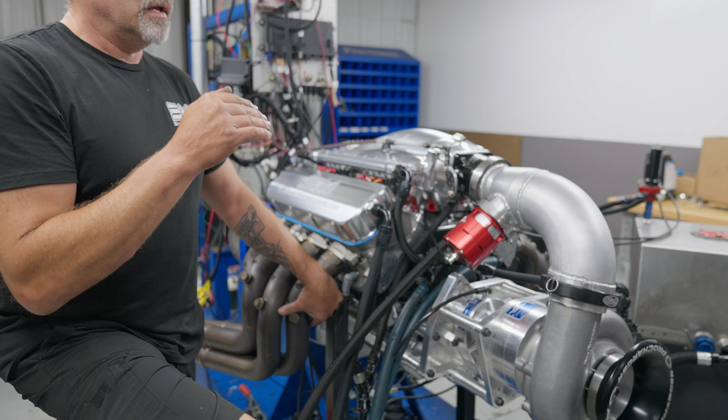Of course, I'm Steve Morris, and this is an engine that we just got done building and just got done dynoing for Raymond Hall. Kyle's been working on the tune-up.

Aw, look at that. That was a happy guy smile.

Anyways, so this is a 540 cubic inch Dart iron block, AFR 385 cylinder heads, an F3 136 on methanol. So methanol, that's hence the no intercooler going on up here directly into it. 2 sets of billet Atomizer 500 injectors on Holley EFI.

Coil on plug, obviously. This has the MSD 600 system. Obviously needs to have a coil driver. Injector driver box along for the second set of injectors.

Now, interesting thing about this is this has been a project that Ray Hall's apparently been working on for a long time, because I looked back at the orders and I had sold him pistons for this engine in 2012. When he sent the engine back to us to have it upgraded, he goes, hey, I was going to build this for gas. Now I want you to do it on methanol.

He had the engine all together. It was brand new. It had never been started since 2012. So he goes, I want to upgrade it and change it into this. And it's like, all right, cool. So it's going in a Grudge car for him. That's all I can tell you on that deal. So this is going to be a really nice piece.

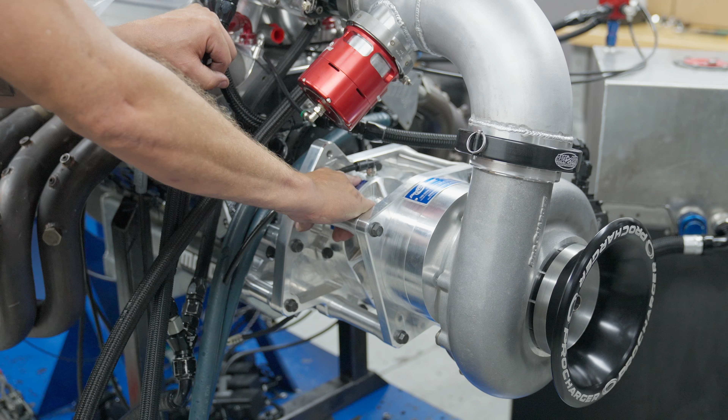Little note, we did slow this blower down. We'll have to rewrite that on the tag here too. It had a 150 gear set, which in this application is spinning the bejeebers out of it. So for a conventional wet sump, iron block, conventional headed big block Chevrolet, 3,000 horsepower is like a really good number for them. Really good number. So they probably can do it, but they have a tendency to break or have problems. So we back that down some.

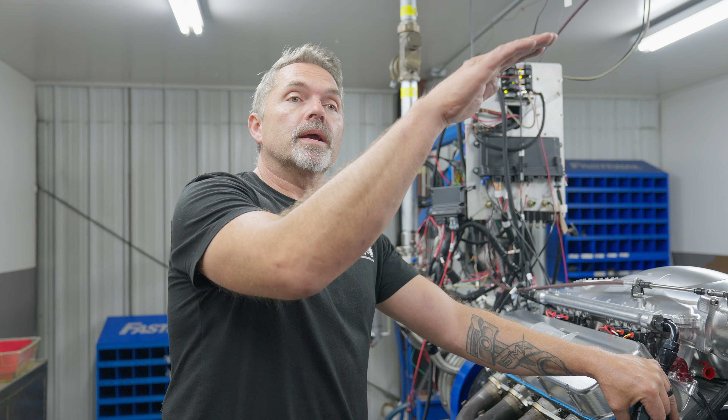So we slow the blower down some so we can make less boost but make more power at a higher RPM. The faster you spin the blower, and this is very loosely paraphrased, very generalized, okay? The faster you spin that blower, the sooner the blower runs out of air. So it'd make all sorts of horsepower, and then if the engine is good enough, the engine would eat it all up and it would nose over.

Okay, so anyways, we slow this down. It makes it easier. It makes it safer. And in a Grudge car, you spin these things really fast like this, and you make a whole bunch of low end power, a whole bunch of low end torque. You got to take it all out to get the car to go down the track, and then by the time the car catches up, the blower is laying over. So there's no sense in doing it. Spin the blower slower and make a better power curve for it. So that's what we've done right there.

We're going to go out, we're going to run this thing. I'll show you the dyno pull, and then Kyle will show you some stuff on the tune.

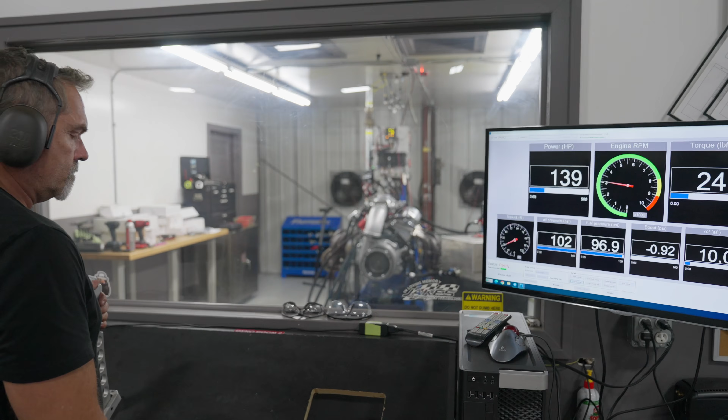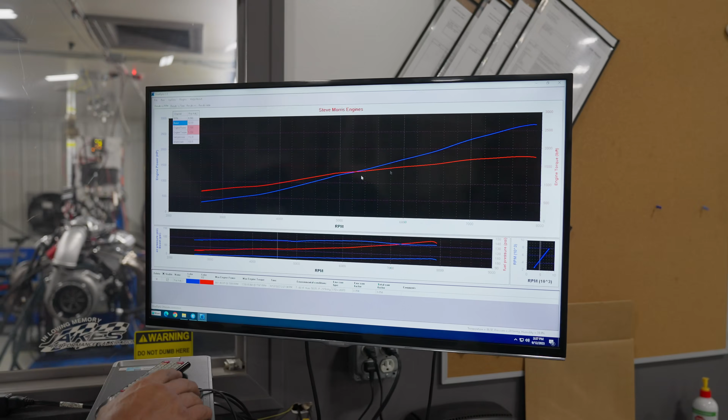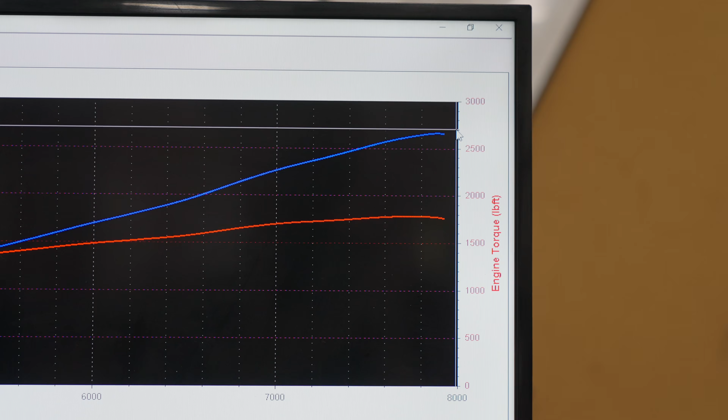All right, so 2662, 7890, and I think it probably just started to pull back on throttle, probably just a tick early. I seen it going up there. We'll close that. Dismiss. Here is our curve. So it just laid over right here, but it was pretty much done climbing. It might make probably right at 2700 at max if it went out there, past 8,000. But that's a really nice, safe spot that we want to have them at.

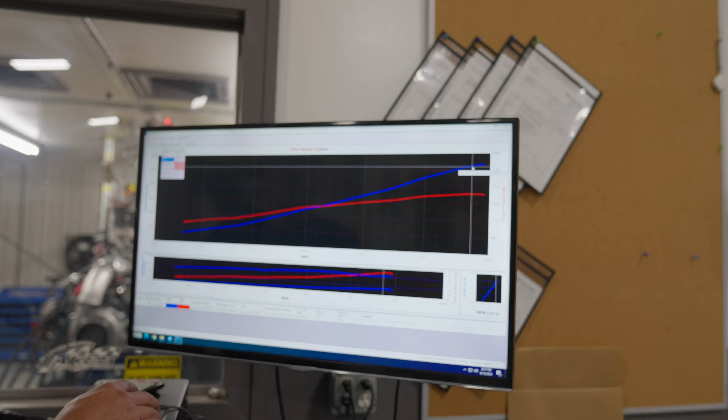And our boost is 36 pounds of boost right there. We could lean on this thing some more for sure, as far as leaning out the tune-up a little bit. We'll look at the tune-up here. Kyle will show you. We could lean it up a little bit more. We could add some more timing to it, but we want to send it out in a really nice, good, safe form for him. He's super happy with the power right where it's at, so that's cool.

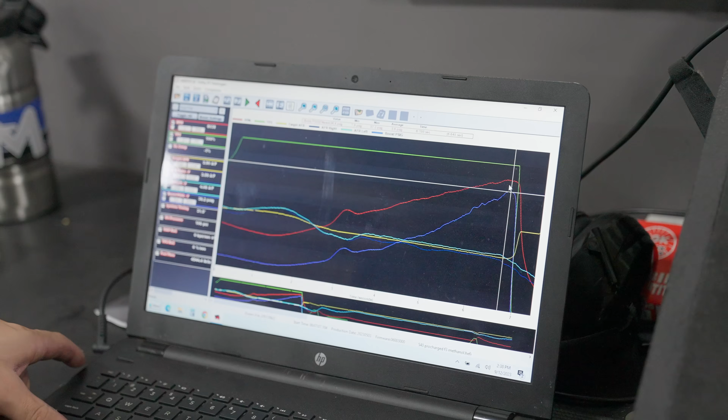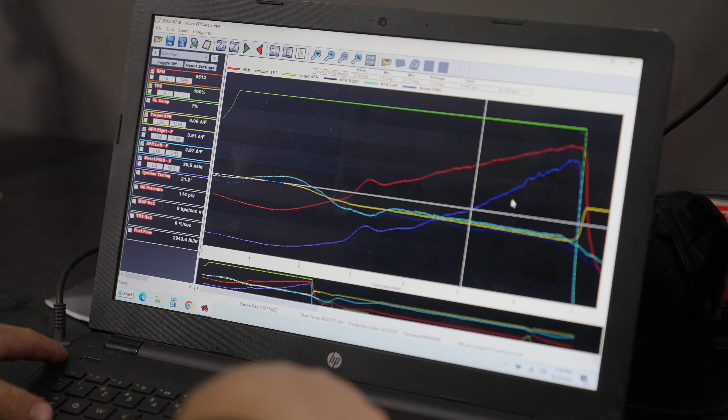And we can look at some numbers here. You want to show some numbers? All right, as you can see there, 36 pounds of boost. Oil pressure 114. Our AFR is just a tick on the rich side of target, but that's all right. Like I said, we want to send it out nice and safe, but I think all the numbers look good there. You see anything you want to talk about?

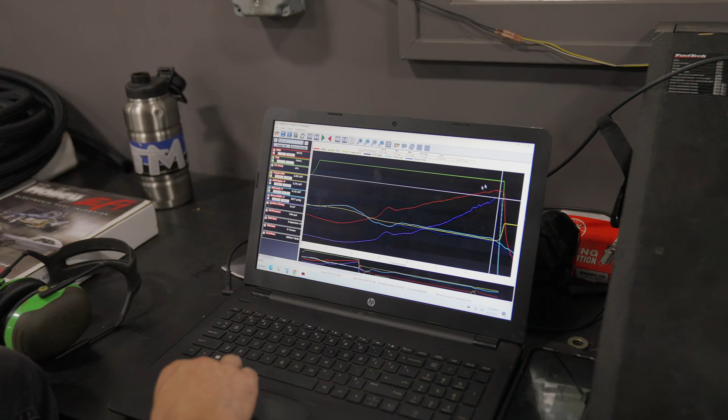Tune-up looks good. What's your closed loop compensation? -2. Pretty much across the board. And how much fuel is it calculating it's using? 4,500 pounds per hour of fuel is what it's calculating out to. So that's like a 1.6 brake number, somewhere around there probably. So I think everything looks really good.

That is a nice stout piece, kind of our normal top sportsman type Grudge car, top sportsman type big block Chevrolet package. They can make some more horsepower, but that's in a really nice, good, safe area where you're not going to have to kill a whole bunch of horsepower to make it work. But anyways, I think that's a really good deal. Nice job on the tune-up. Probably could clean that up a little bit, but otherwise.